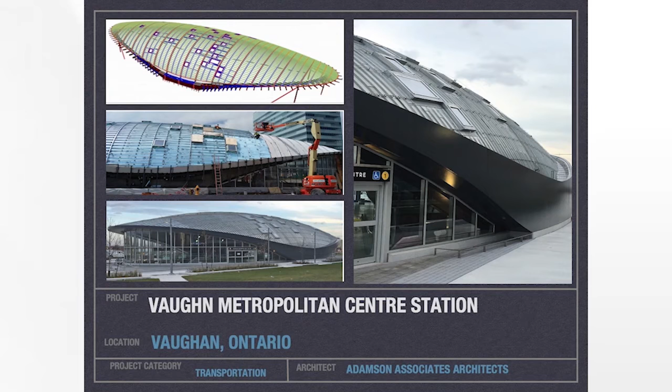Knotwood is similar to longboard. Just as the name says, it's not wood, it's aluminum. We've been doing some Tim Hortons and Wendy's and KFC's, McDonald's, and a strip mall in Halifax, Nova Scotia. We also have battens with Knotwood that achieve great shading if you like, and they're a nice visual aesthetic element.

That was a short introduction to Exterior Technologies Group and some of the projects that we've done and completed around Canada. This next slide shows you our learning objective today.

We want you to really today understand the safe use and how to specify combustible wall claddings when used in non-combustible construction. Here's a look at our agenda for today.

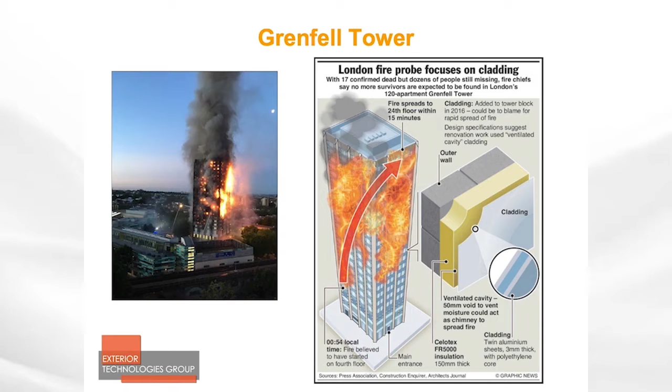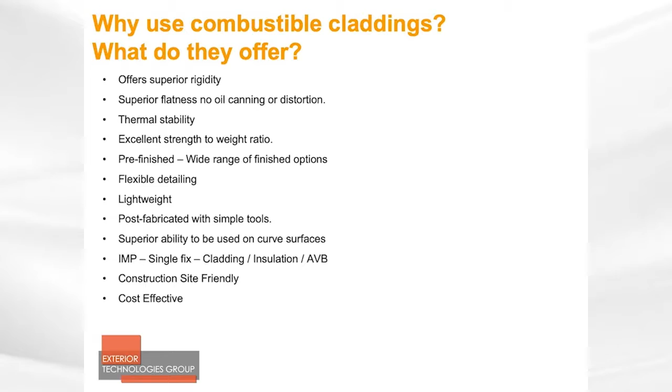So after seeing that slide, why use these combustible claddings? What do they offer? Well, they offer superior rigidity, superior flatness, no oil canning or distortion on the surface of those claddings. They're really construction site friendly, and they come pre-finished in a wide range of finish options, anything from a wood grain to a prismatic paint to a solid paint. And they have flexible detailing, and they're very lightweight. Most of the panel systems that you see around your cities in Ontario are fabricated locally, and they're very cost effective. So let's get into some of the types of non-combustible claddings.

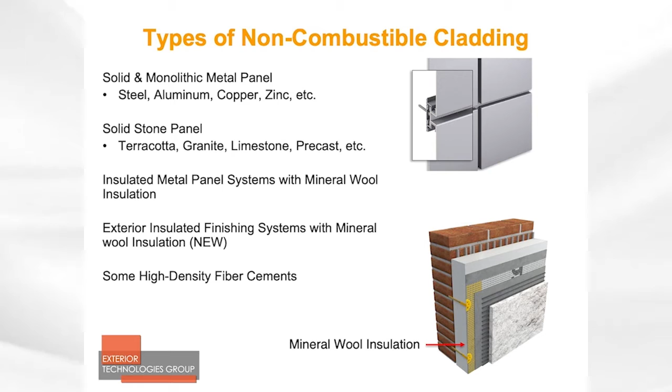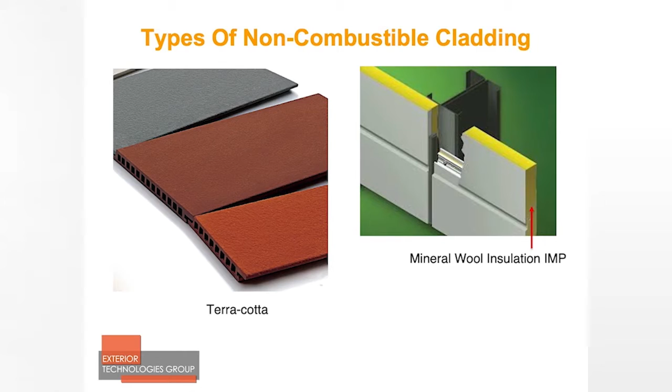The types of non-combustible claddings are solid monolithic metal panels such as steel, aluminum, copper, stone, insulated metal panels with mineral wool insulation, and some high density fiber cements. I'd like to show you some photos and details of some of these cladding types: zinc cladding, copper, granite and limestone. You'll recognize most of this: mineral wool, IMP, terracotta.

Now that I've introduced you to some types of non-combustible claddings, let's look at those claddings and the materials they're made of, and let's look at the tests that are required to prove that the material is non-combustible.

The first test is CAN/ULC S114. It is in the National Building Code of Canada and in most provincial codes in Canada. It's a very severe test which heats the material up to about 750 degrees Celsius, and the material has to sit in that chamber for about 20 minutes. If nothing happens to it, it doesn't lose mass or catch on fire, then it's considered non-combustible.

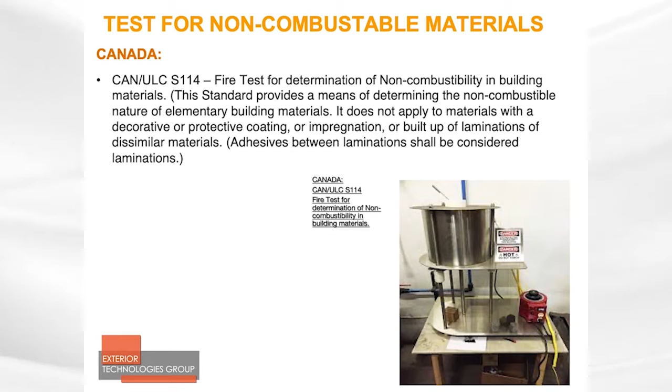Another method in the building code so that a material can be qualified as non-combustible is that the material must be tested to CanULC S135. This is, if I can say, an easier test to pass. The S114 was very severe, and nothing could pass it except solid steel or solid stone, concrete, brick, and so on. But the S135 is another method which the code accepts to be considered non-combustible.

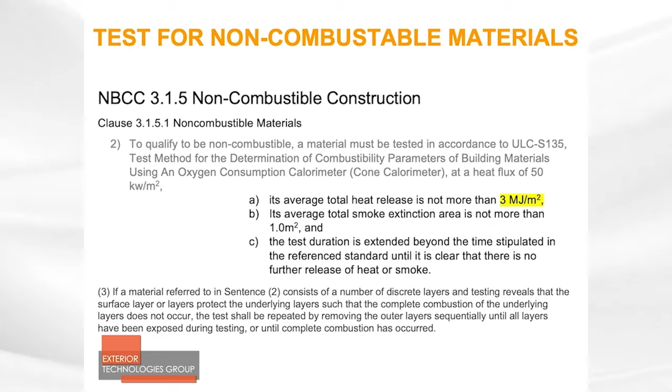So they measure the material that is going on the wall or being used as a cladding, and that material has to have a heat release less than 3 megajoules per meter squared. Now, if the material is a combination or a laminate, and it has distinct layers like an outer skin, a middle core, and a back skin, all three elements must be tested separately.

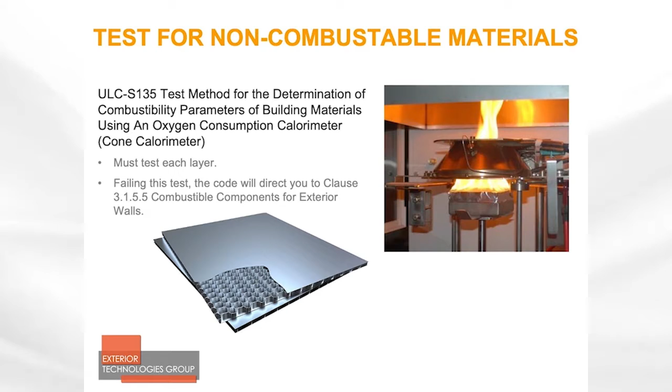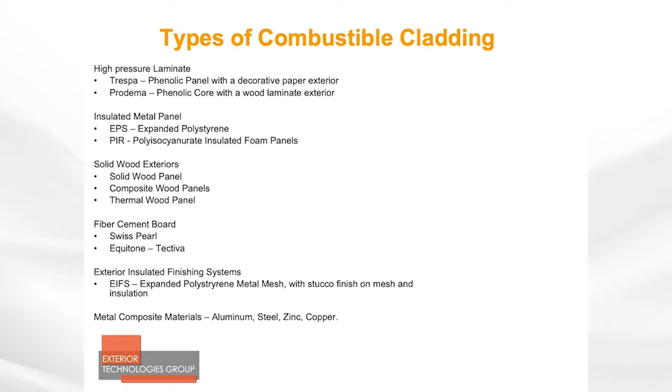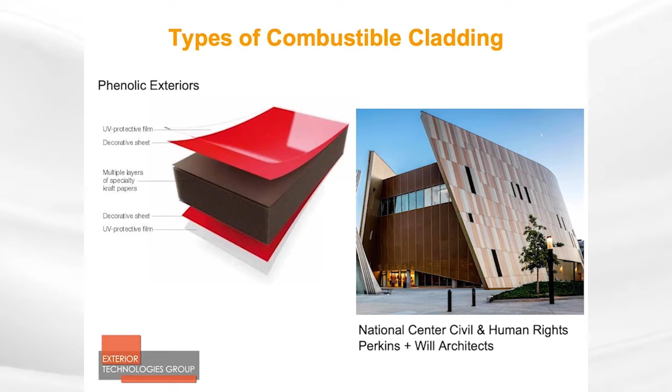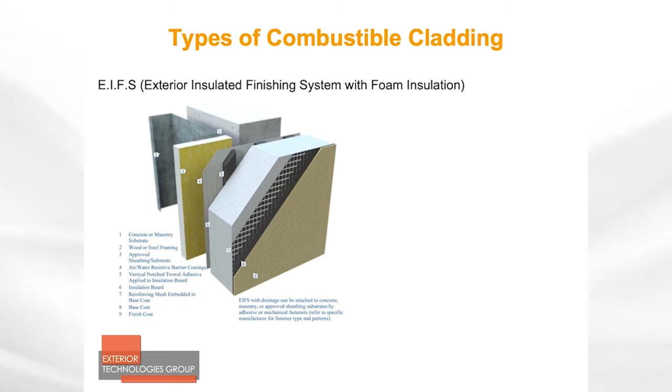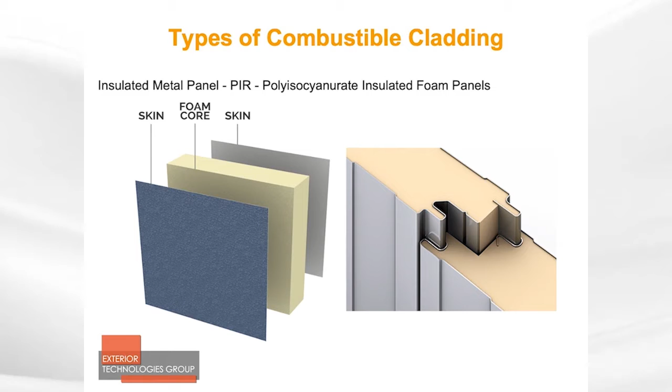Exterior insulated finishing systems, or EIFS, are combustible, with polystyrene or polyiso type insulation. Insulated metal panels, which are used in warehouses and so on, as a replacement for precast, sometimes have a very high insulating value, but the skins are made of steel. There's a foam core of polyisocyanurate and a back skin of steel.

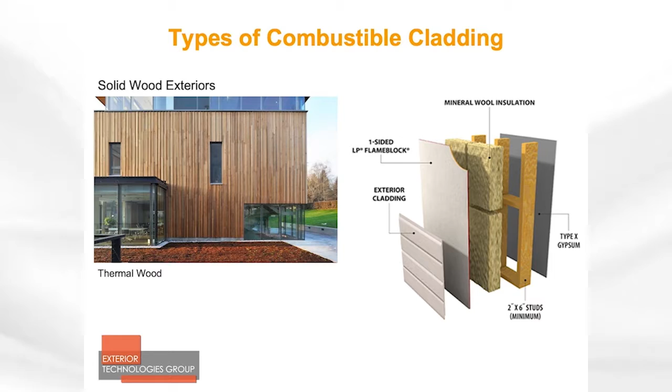Of course, some wood claddings that we're using now - and you as architects love wood claddings - but you have to be cognizant of the code with these claddings. And then aluminum composite materials, such as Alucobond or Reynobond, the trade names, but basically a laminate material, a bonded material with an outer skin, a middle core, and a back skin.

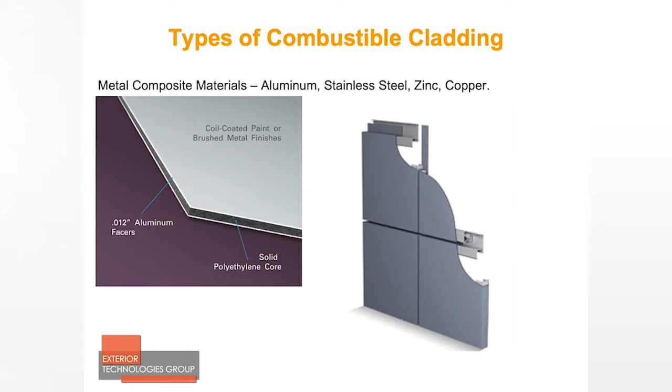Now, all these materials have to be tested too. So going back to the previous slides, if you can't pass CanULC S135, if you cannot pass CanULC S114, then the code - because we have an objective-based code in Canada - allows you to be used in non-combustible construction, but another test is required, and that is the CanULC S134. It's a full-scale wall test for combustible claddings that are used in non-combustible construction.

In the building code, going back to those slides, the code asks you to run an S135 to see if your material is non-combustible. If you release more than 3 megajoules, it directs you to this clause in the code, 3.1.5.5, for combustible components in exterior walls.

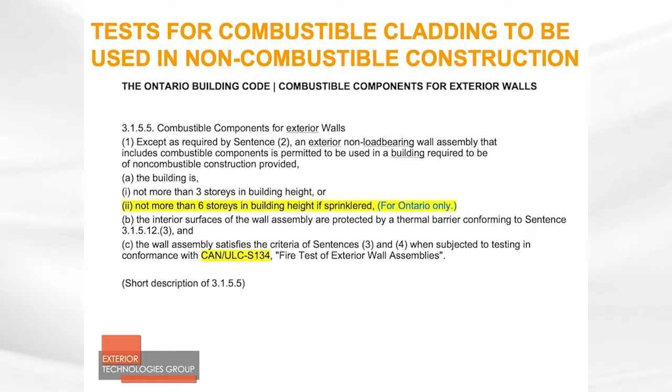In Ontario, combustible components should not be used above 6 stories in building height if the building is sprinklered, and that's Ontario only. In the National Building Code, you can use these combustible materials to any height, and all other provincial codes in Canada can be used to any height. And that's where this CanULC S134 is referenced, in that section 3.1.5.5.

Here's a picture of the test. It's not a very clear picture, but we'll see the test a little bit in action later on in the presentation. It's a very big apparatus, measuring about 3 stories high.

We basically light gas burners in an apartment-size area. It has a window, a large window, and that fire is allowed to propagate out the window and move up the wall. The only way you would fail this test is if that fire burns the panels more than 5 meters beyond the window, and then the heat flux - the amount of heat released by the panels or the wall cladding itself - is greater than 35 kilowatts per meter squared. Then you would fail.

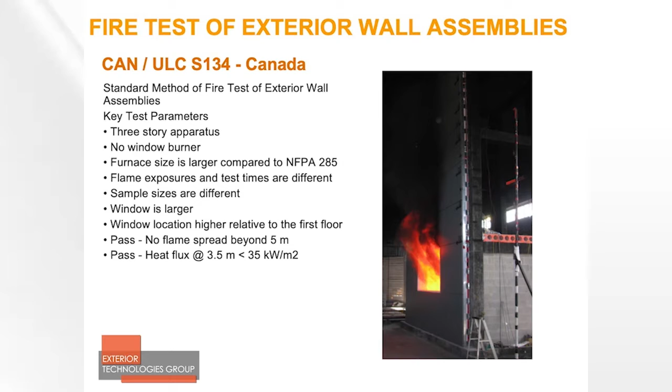What does that test evaluate? I just went through it, but this slide presents it again.

It measures the fire spread over the exterior surface of the wall, the heat flow from the fire plume to the exterior surface of an adjacent building, and it measures the fire spread within the test specimen.

One thing to note is that there's a new version of the test, 2013. It's similar to the old 1992 version, except now the panels have to have a joint directly above the window opening. Canada's test is probably one of the most severe in the world.

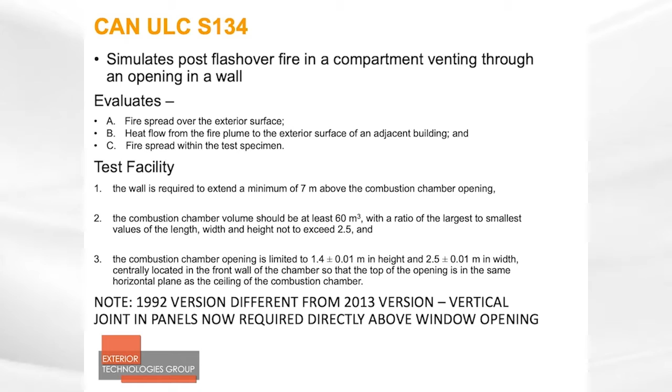Next, I'd like to discuss fire behavior of combustible facade claddings, anything from phenolic to EIFS to metal composite panels.

If you look at the graph on the right-hand side of the screen, you see high pressure laminates at the top, and at the bottom, some fiber cement boards. The 256 is the amount of energy that the phenolic panel is releasing. Metal composite panels are somewhere in the middle, and then you see fiber cements down at 12.8.

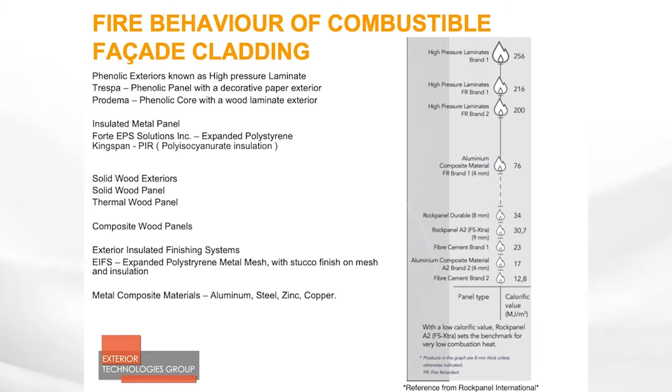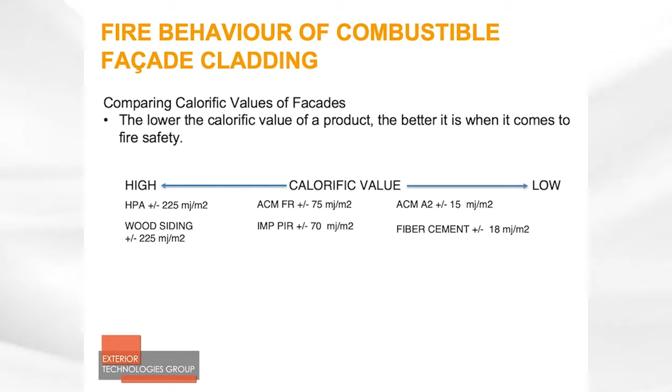The next slide illustrates comparing those values of heat release in facades. Wood siding and high pressure laminates are all around 225 megajoules per meter squared. ACM and IMP type panels are in the middle. We have a new core used in Europe with ACM panels called A2, which has a lower value, and then fiber cements are low. Keep that in mind when you're selecting these products.

Now that we've learned something about fire behavior of the claddings and energy release, let's look at selecting a combustible cladding in buildings of non-combustible construction.

In the design phase, you're going to go to the building code and consider the following: Part 3, the fire protection and life safety aspect we discussed; structural design of your envelope system; environmental separations; heating and ventilating, which comes into insulating the wall system; and Part 10, energy and water efficiency. You'll also be influenced by municipal planners, zoning requirements, and NFPA requirements.

In the design phase, you're also going to look at the grouping or classifications of your buildings. For example, Group A Division 3 is arenas, Group C is residential or multi-unit residential, and Group B Division 1 is detention centers.

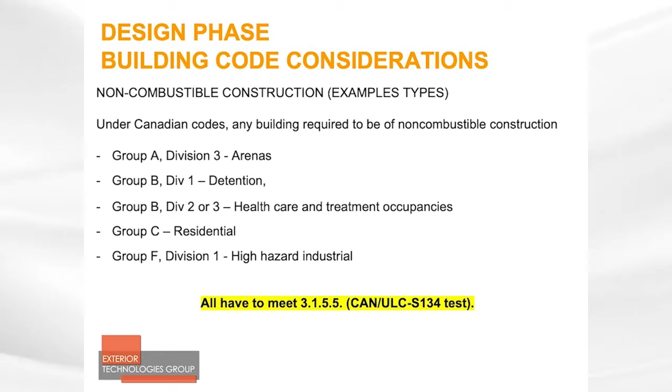So in those areas, when you're looking at those parts of the code, they will point you to either using a non-combustible building product and material which meets S114 or S135, or if you choose to use a combustible product, the code will direct you to 3.1.5.5. That's the test we discussed, the CanULC S134.

After you've designed and specified the material and the proper testing it should go through, and you're in the construction phase, communicate with the contractor, look at the shop drawings, review the assembly, review the material being used. Make sure if it's a combustible type material on the wall system, it meets S134, and that they have a test for it. Better yet, if they have a listing, that's even better than the test. Check that the material is consistent on-site with the shop drawings.

You're getting FR core, which is a white-gray core, and not a PE core of the cladding material, which is a black core.

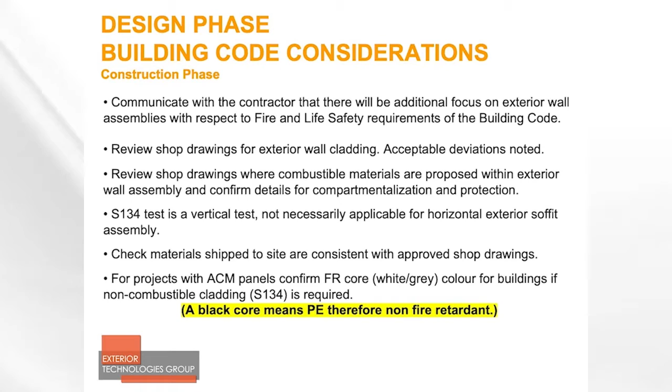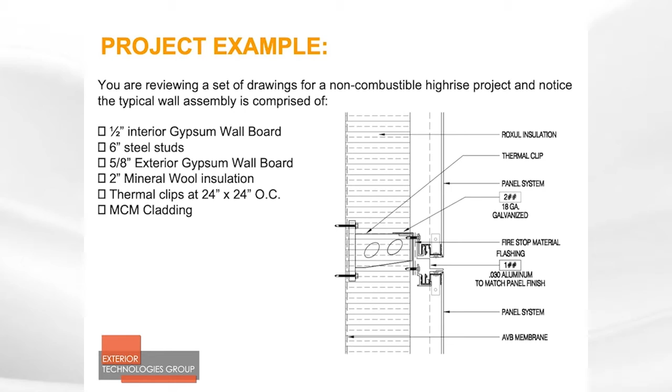Here's a project example: half-inch interior gypsum wallboard, 6-inch steel studs, exterior grade gypsum, and then the thermal spacer attached through the exterior grade gypsum into the stud wall. You could have 2, 3, or 4 inches of mineral wool insulation. The thermal clip is there, and then the MCM cladding system.

So now let's define your project example that we just looked at, in detail.

When you're reviewing that project example and reviewing the shop drawings, make sure the shop drawings conform to what has been tested or listed. Reject the design if it fails to meet the S134 assembly you're looking at, and look at all the additional minor combustible components, such as thermal clips and so on. If there's a significant deviation from the tested assembly, get with your code consultants to see if an engineering judgment is required to approve the wall assembly.

In Ontario, we have what's known as an alternate solution in the Ontario Building Code. As we learned in past slides, combustible materials in Ontario can only be used up to 6 stories. But since we have an objective-based building code, you can apply to the local building officials for an alternate solution to use those materials above 6 stories.

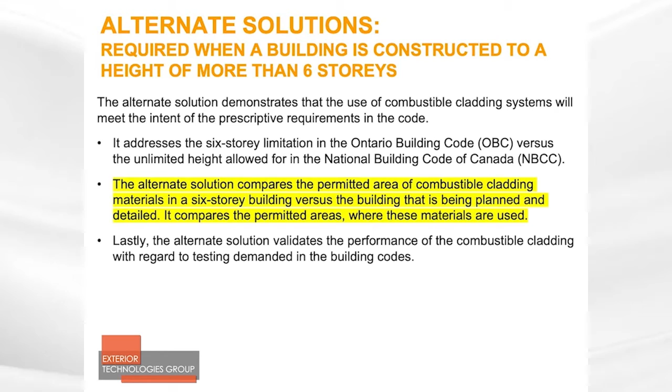So what does the alternate solution do? It compares the permitted area of combustible claddings in a 6-story building versus the building being planned and detailed. Lastly, the alternate solution validates the performance of the combustible cladding with regards to testing demanded in the building codes. These alternate solutions are really done by fire code consultants.

LRI, which is one of the best code consultants in Canada, has done a few of these projects with us.

All of these alternate solutions are subject to acceptance by the chief building official of every city, such as Toronto, Hamilton, or Markham.

In this segment, I want to discuss briefly trends in wall construction and how the energy code is really clashing with some parts of the building code, especially life safety and fire in terms of Part 3.

The Grenfell Tower example is a great example. They used polyisocyanurate insulation, which is a foam that offers great insulating value but burns. So the systems really have to be tested, which that one was not, with polyiso and aluminum composite panel.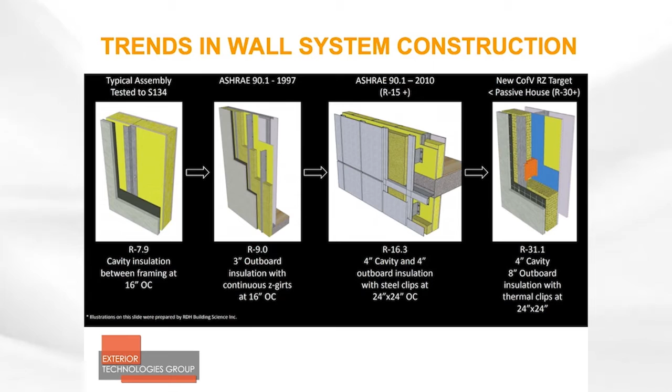The other trend we're seeing is fire barriers or cavity barriers within the rain screen system. These barriers could be vertical or horizontal. The vertical barriers are found mostly at building corners, and the horizontal cavity barriers are often designed so they are 2 to 3 modules in height, stopping any fire from propagating up the cladding.

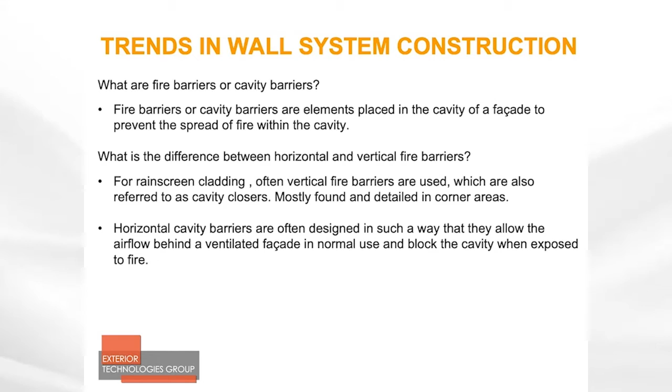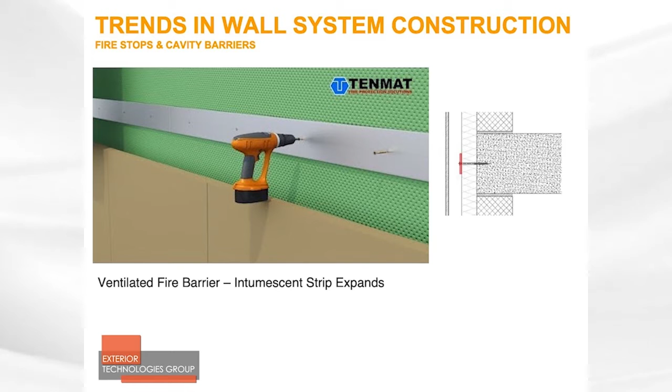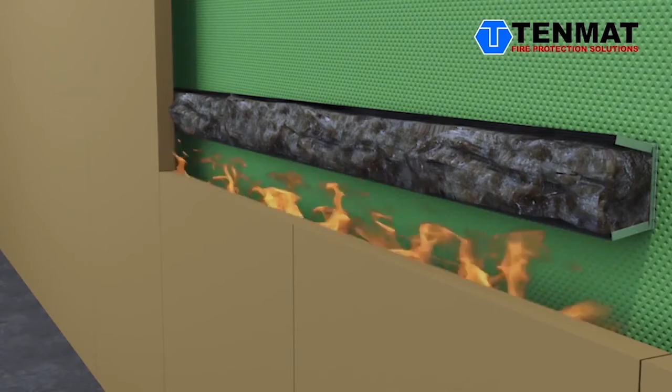It is an intumescent strip fixed to the substrate, and when that strip detects a rise in temperature, expanding insulation like mineral wool insulation will expand into the cavity and form a fire break.

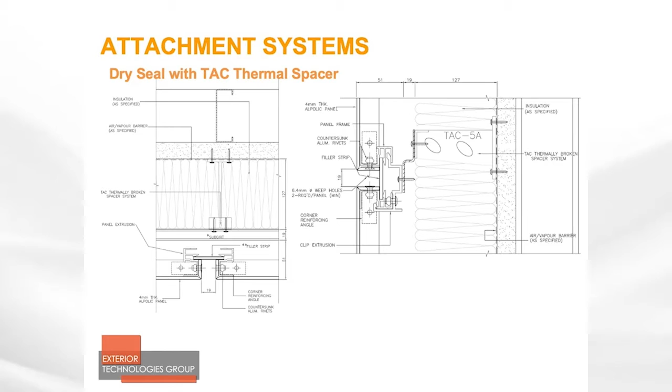These fire stop developments will add to typical attachment systems. Some typical attachment systems here, as we discussed, are off a steel stud with exterior grade gypsum and the insulation panel system. This is a horizontal and vertical joint with a thermal spacer.

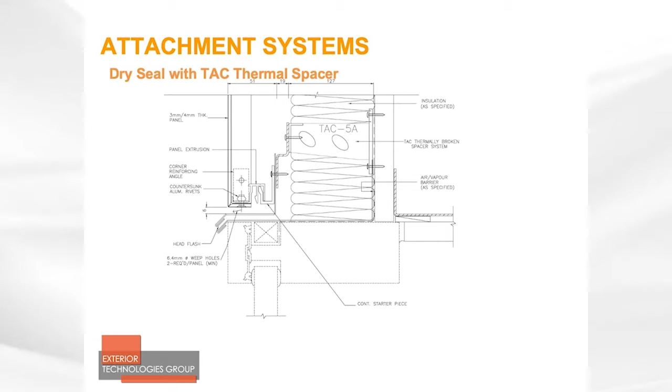In Canada, what you should be specifying and what you should see in your specs when specifying these materials is that the material is tested to CAN/ULC S102, which is a surface burning test that measures smoke development and flame spread.

S102.2 is a test method for determining flame spread and smoke development in ceiling and soffit applications. In fact, if you remember that picture of Ryerson Student Center, we actually had to peel the aluminum skins off the composite material and test it to S102.2 to make sure no dripping of the core occurred.

CAN/ULC S114 is the test for determining non-combustibility in a building material. S135 is another test for determining combustibility parameters in a building material. And S134 is the standard method for fire tests for exterior wall assemblies.

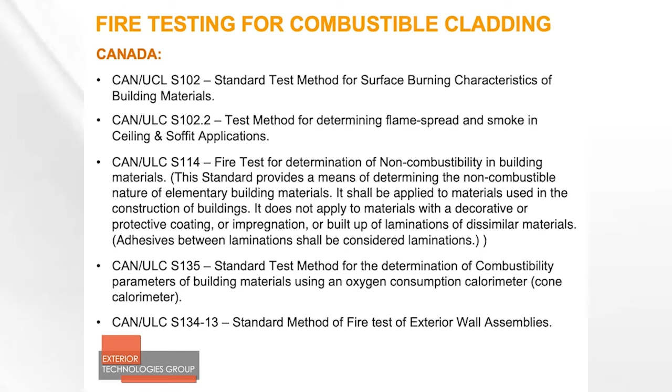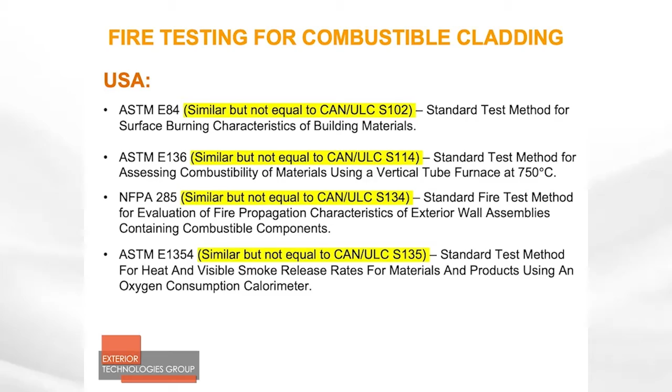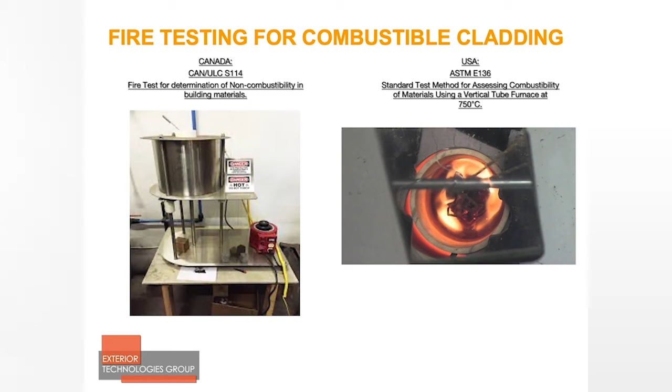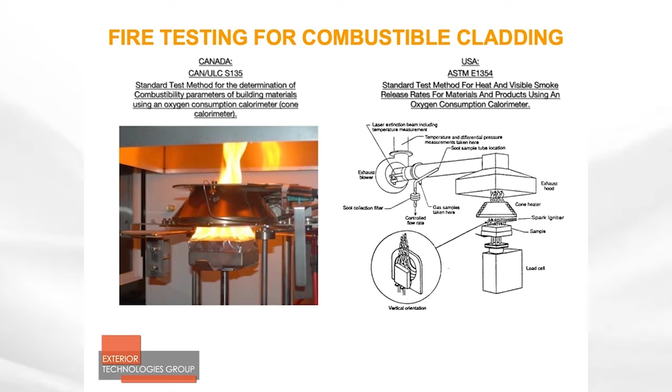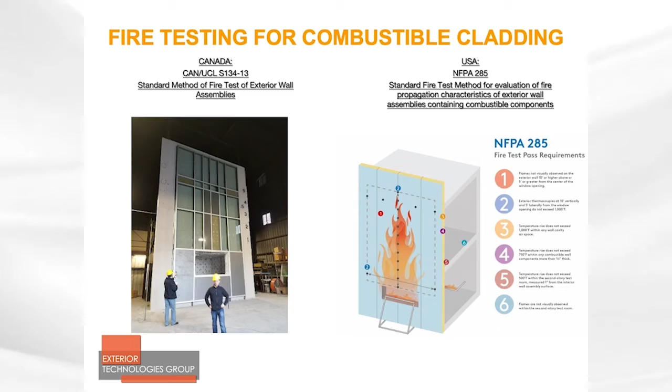Like I said before, the Canadian test is one of the most severe in the world in terms of heat output and fire output. The NFPA 285 has lower values of fire output and heat output.